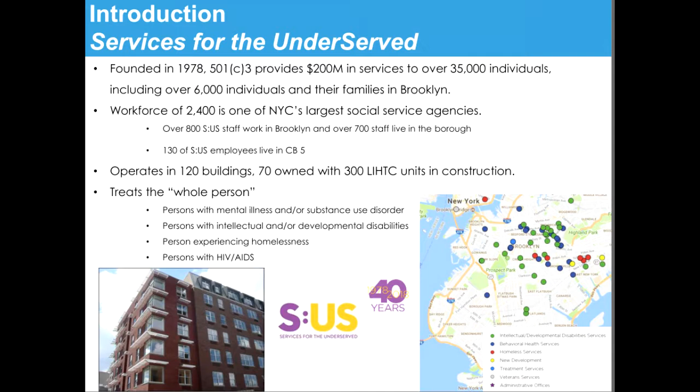disabilities. We were started to help people find community-based housing as a result of closing large state-run institutions for people with developmental disability and mental illness, such as Willowbrook, which some of you who are a little older may have remembered. And we now operate in over 120 sites throughout New York City, including over 50 in the borough of Brooklyn. We have a very large presence in Brooklyn.

Our first project, in fact, in 1981 was opened on Vernon Avenue. We have over 800 staff that work in our borough and over 700 that live in our borough of Brooklyn. We'll talk more about the service to be provided later.

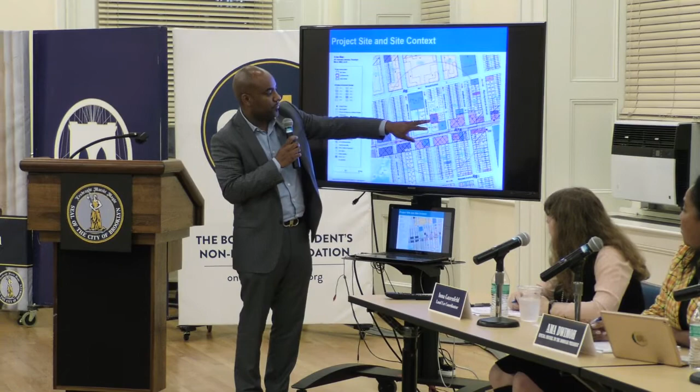So the project site and context, the site is illustrated here. That is the 461. You could take the mic out if it's helpful. Okay. It's 461, and as I was saying, CB Emmanuel owns and manages all of these sites here currently. This is Success Gardens, but this was the site. For the last 20 years, we've been here managing and operating this, and we've actually been maintaining this site as a green space during this time because it was just wild at the time.

It's between Livonia and Dumont. As you may or may not be aware, the Livonia corridor development has gone on, and there are 6, 7 and 8-story buildings along Livonia developed. These were the later ones. These were the earlier ones that were developed.

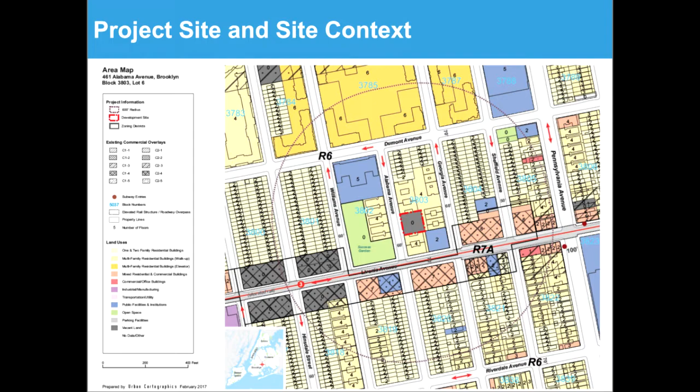This is more of the site. This is the actual street. This is Alabama. This is the site here. These are the buildings that I referred to that CB owns and manages. This is the actual site here on Alabama. It's near Success Garden, which is here on the corner. Lions Pride is a couple minutes away, and Martin Luther King Park.

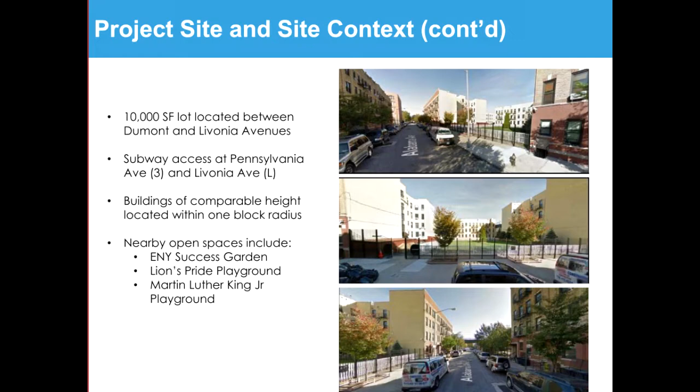The history of this project, well, first off, we applied for the minority RFP. We were awarded this site, and we had our kickoff meeting with HPD in January of 2017. After a few meetings with the council member on the dates illustrated here, March, July, and December, we've gotten input from her and from land use, and we implemented those suggestions into our plan.

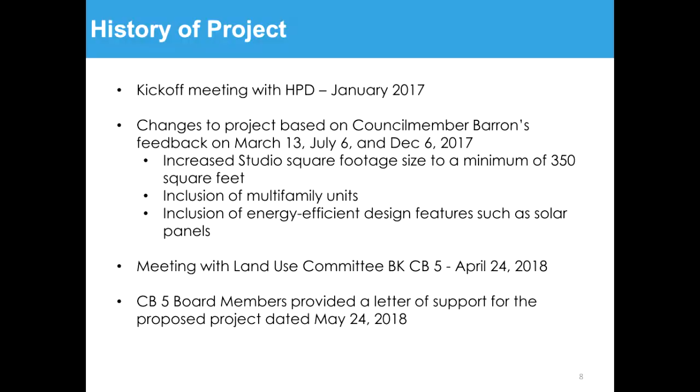We met with the land use committee in April, but we also met with them again in September because the ULURP process hadn't officially started, so we had to go back to see them again. And we just met with the community board September, I want to say 24th, and got their full support.

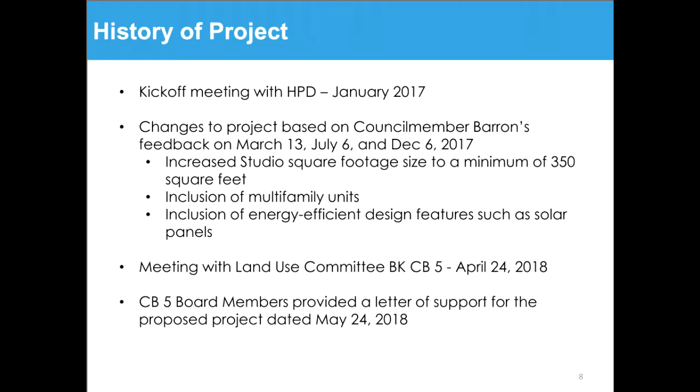The proposed program, we talked about the 70 units of housing, 1 super unit. There will be 43 supportive units that will service 40% AMI and down. The referral list is coming from DHS, and there will be 27 affordable units, of which 50% of these units will be marketed to Community Board 5, have a preference.

And just to point out the rents, it is a 100% affordable project. The estimated rents are $816 for a studio, going up to $1,224 for a 2-bedroom. And the estimated income is illustrated as well, $40,000 for 1 person, and up to 3 people, $51,000.

Thanks, Chris. So as Chris mentioned, 60% of the units are going to be reserved for people who are experiencing homelessness. They're coming from homeless shelters, and they have either a mental health challenge or a substance abuse challenge, or co-occurring, both. So for SUS, this is kind of our bread and butter.

This is exactly why we exist, to help people who are coming from shelters and in crisis, and to try and get their lives back together and on track. The service delivery begins at the time when we first meet the individuals.

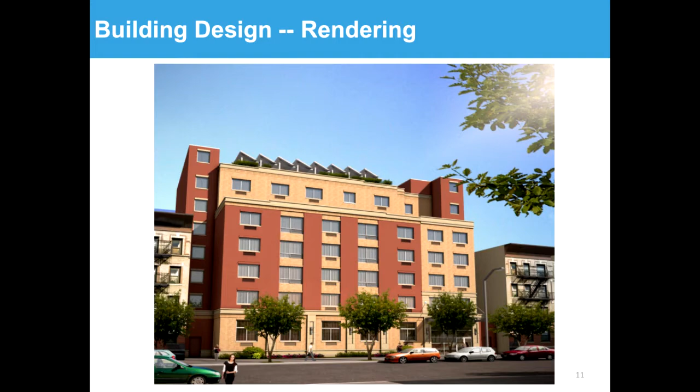In addition, we've added lights on those piers for security at night, so the street is lit as a pedestrian comes by. And we've incorporated, as you can see in the rendering, a small landscape bed there to soften that experience as well, so it's not just concrete sidewalk directly against a brick facade. To the right side of the rendering, it's somewhat hidden by one of the trees, but there's a glass entrance with a glass canopy, and that precast stone goes up for 2 stories to help announce that entrance.

It is a 7-story building, but you can see on the 6th and 7th floors, we have stepped the building back, again, to lower the visual impact for the neighborhood and for the pedestrians walking by. Additionally, the 2 stair towers, which are on the far sides of the building, are significantly stepped back, just to avoid creating a solid wall or solid mass from that streetscape. At the very top on the roof, those are solar panels, as well as a green roof will be incorporated into this project.

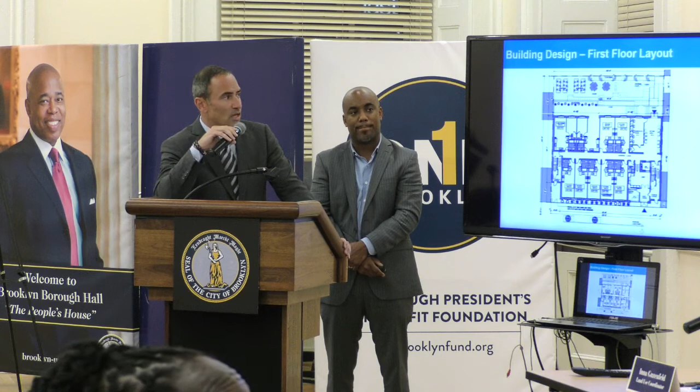So what we have here is a compilation of the first floor plan, as well as the rear yard on a site plan. What you can start to see here is we've incorporated Active New York design techniques. So when you first come into the building, in the vestibule, you do have the option of taking the stair tower up to the residential floors, as opposed to necessarily using the elevator, although the elevator is directly off that lobby.

As you saw on the rendering a moment ago, those stair towers do have windows on all floors, so it will be a very bright, vibrant area for the residents to walk up through if they so choose. Another nice feature on this first floor is this common area directly off the elevator. It allows the residents to congregate, to sit, interact with each other, and it's directly next to one of the community spaces, the computer room, which will have glass walls around it, so it can be integrated for both the people using that and the people sitting there.

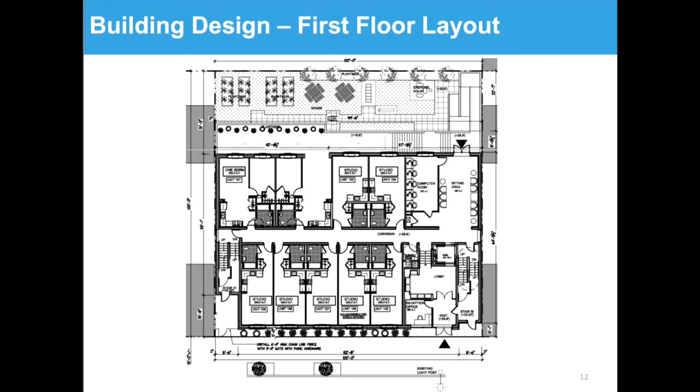We've incorporated a set of double doors here, glass doors, which lead out to the rear yard. That rear yard has an exercise path that, again, is part of the active New York design. But not only do we have an exercise path, we've incorporated gardens or planting areas for the residents to grow their own vegetation with, obviously, the help and guidance of SUS.

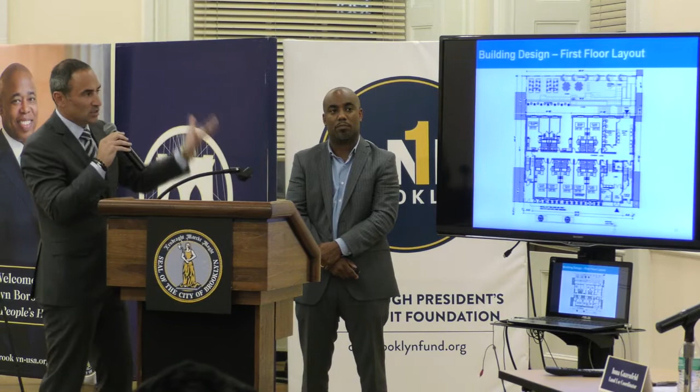What you start to see here as well, we have a larger staircase, approximately 8 feet in width, that comes down to this lower level, which has a tiered landscaped wall. That turns into an area which is allowing light and air down onto those community spaces that we were talking about. So SUS's offices are down there, as well as some of those community rooms, but they open up into this area and then can connect back to the rear yard as well.

So here's a typical floor plan, just to give you an idea of what I was referring to before about the stair towers being stepped back significantly, approximately 15, 20 feet. This is the typical floor in here. You see the studios, a double loaded corridor, studios, and then the 1-bedroom lines over here.

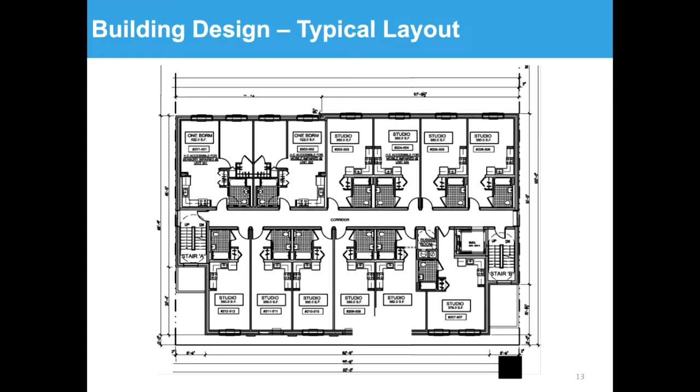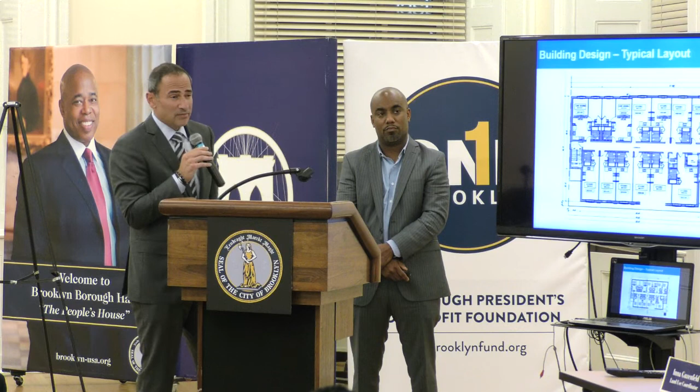Some of the additional green criteria that we're incorporating into the building would, as I had mentioned before, we had talked about photovoltaics or solar panels. In addition, the roof is occupiable, so we'll have a green roof that the residents can sit up there, experience the green roof, as well as sit and enjoy that area. We'll be using LED light fixtures, low flow plumbing fixtures, low or no VOC adhesives and paints, high recycled content in the finishes.

And as far as Passive House, we've looked into that, and while we cannot financially achieve Passive House certification, we've certainly learned a lot while going through the research, and we'll be incorporating certain techniques such as increased insulation, sealants, additional flashing, and especially HVAC design.

We do not anticipate puncturing holes in the exterior walls, similar to like a traditional PTAC unit or even a through-wall AC unit. We're not going to be doing that. We have not nailed down the final HVAC design yet, but there are several options, such as split systems or water source heat pumps that will allow us to keep the building tight and extremely energy efficient.

And lastly, our project timeline. As we stated earlier, the ULURP application was certified on August 20th, 2018. The community board reviewed 60 days. We met with the community land use first on the 25th and was approved. And we met with the General Community Board on the 26th and was approved as well. And today we're here to see the Borough President's review. And we're anticipating closing this project in December, if not sooner, of 2019. And that concludes. Questions?

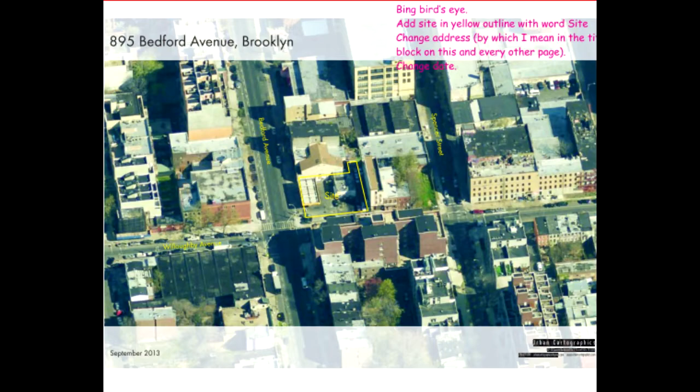Brian seems to be taking over Brooklyn by storm. He's a great architect, so you're lucky to have him designing some buildings in the borough.

We're proud to present this application for a rezoning, which you can see here is on the corner of Bedford and Willoughby. It's the site, of course, in the middle that's marked site. And it's a request to rezone that entire block front between Spencer and Bedford on the top side of the map there on Willoughby from its current manufacturing designation to an R7A zoning district with a C2-4 overlay.

I'm proud to say that we've been working for the better part of the last 2 years very closely with Community Board 3. We've been to 3 or 4, maybe even 5 meetings. I lost track, but we've been to a lot of meetings with Community Board 3 through the ULURP process. During almost that entire time, they were very welcoming to the project. They had a lot of suggestions, though, and a lot of their suggestions revolved around the design of the building. They're okay with the idea of the rezoning. They like the number of affordable units we're creating, and I'll go through that.

But I just want to cut to the chase: what they really wanted to see was the design. And I know it was a question that came up earlier, how we're going to memorialize that. So the brickwork on the building was something they wanted to see. We showed them samples, and we agreed on a brickwork. The black matte finishes on the building, they were very concerned because evidently some developers will put up an aluminum type of black matte, and I'll show you on the rendering in a second, and that gets dented. So they were very specific about the windows.

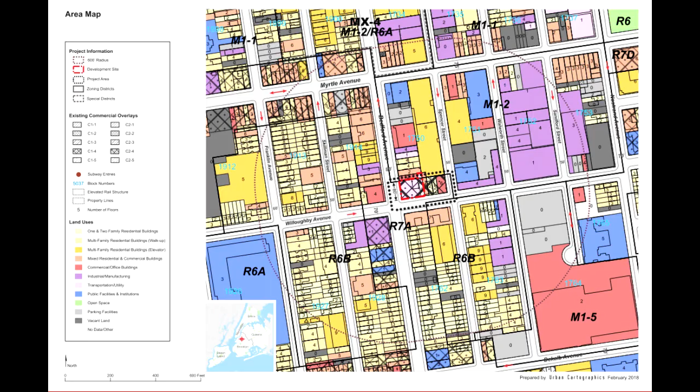These two we have been in touch with. There's residential also on the block on these two buildings that are between us and the corner. So by doing residential here, we feel we blend, as Marisa Tomei said in My Cousin Vinny, and we feel that we're well supported by not only Community Board 3, but as well as by our immediate neighbors

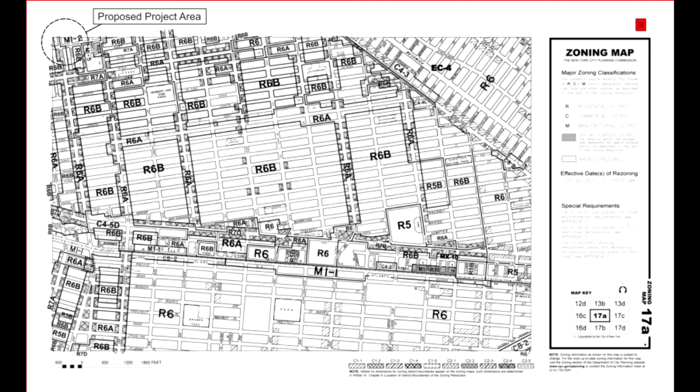who have supported it. Again, the tax map, the zoning map, this is stuff that you've all seen and you can't really read. But here's a very clear zoning map showing you, again, the zoning change. On this side, you have what we have right now. It shows you the M1-2 zoning designation encompassing the property. And this shows you the R7A I was speaking to, just being extended to cover our property, our block front.

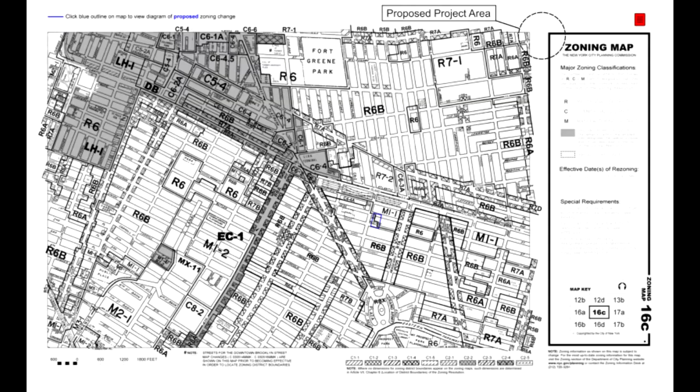This gives you an idea of the site itself. I didn't start off by telling you, I assumed you were familiar with it. It's an existing Shell gas station. Bill Wolf Petroleum is the owner. Again, I mentioned before, they are here. I know that we have a problem in Brooklyn with disappearing gas stations, and it is a concern. There's a reason why some of the gas stations are disappearing, and this is a good reason at this site.

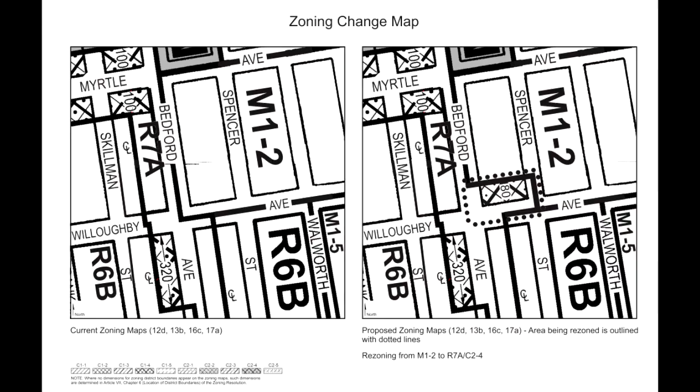It's an older site. It's got repair bays on it. Nobody really gets their cars repaired that much anymore. Some people do. I don't mean to imply that everybody is driving a car that was built within the last decade, but for the most part, the cars that were built within the last decade are no longer similar to the cars that were built in the 70s, and these cars don't need repairs as much.

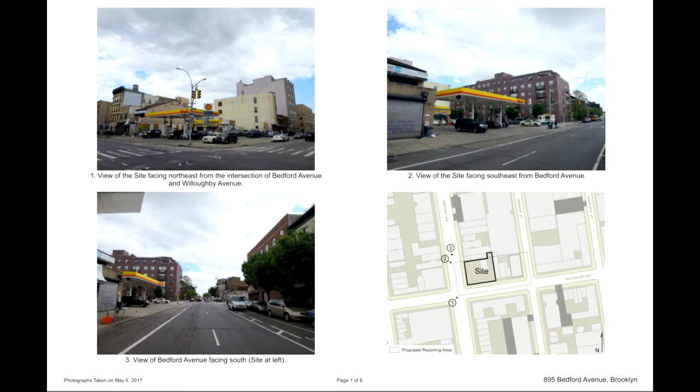So the repair business, and I'm sure you could appreciate that yourself, the millennials don't have cars, they have Uber, but the baby boomers that have the cars, those cars are all on leases. And the cars usually go back before they need extensive repairs. So the site is disadvantaged with the repairs. It's also disadvantaged because it's off the beaten path and it's not a big site. It can't do the volume that the gas station really needs to make the money.

Once you get rid of the repairs, the only way to make money in a gas station is by doing volume. That's why you see other stations, such as those on Atlantic and Bedford. Across from the Armory, there's a Mobil. I'm sure you're very familiar with it. It's big. It's got 10 pump islands out front. It's got a big convenience store. I'm sure you see it when you go on the Jersey Turnpike and all the highways. That's how the gas stations are, and that's how they make money.

So these old school gas stations, such as this, which is a relic that was opened back in the 40s, don't have the ability to make as much income, and that's why we're asking for the zoning change. It's barely functioning right now. Clicking through the photos, you could see what I was talking about before with the character of the residential buildings that are around us. So that was what I was trying to call out.

We're asking for, I think, a logical extension of the residential zoning district around us. Again, these photos all show you the residential around us and how we blend in. And just more pictures of the residential and taller buildings around us. I'll come back to the affordability, but I'll touch on it here for the purposes of our conversation, then I'll come back and dig in a little deeper on it.

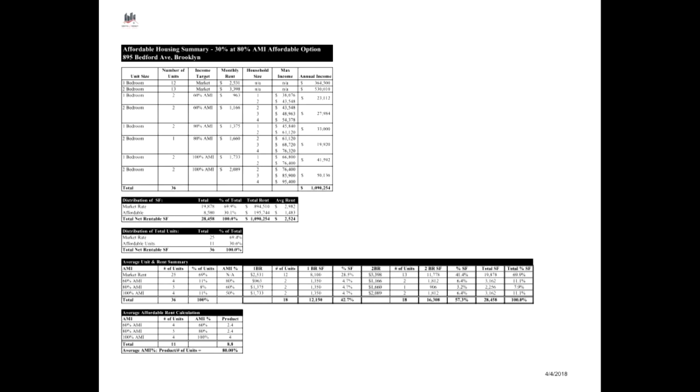We're asking for 80% affordability, 30% of the units at the 80% affordable level. There'll be a total of 36 apartments within the building. 11 of the 36 are proposed to be affordable. 6 of them will be 1 bedrooms, and 5 of them will be 2 bedrooms. And I'll come back in a second, and we'll talk about the matrix and all of that jazz, so we can go through the numbers a little bit more.

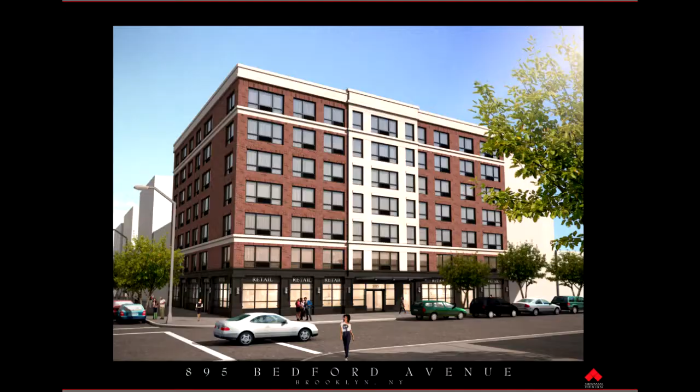They wanted the windows, they wanted to be sure that what Brian is representing here is actually what is built. And I know that and they know, they're very savvy obviously, they've been through this for years and years. They know once a rezoning comes through, a developer can build whatever they want. Here we're blessed with a great developer, they're local, they don't sell their properties, they own a lot of properties in New York City, they do not sell, they will be developing this, they're not flipping it. They have given their word that they will build to this specification.

I understand you would like something maybe a little more solidified. We're happy to give you a letter from them or an affidavit or some type of testimonial to their intent of the bricks that they intend to use and the facing materials and the windows. And Brian Newman, who you're beginning to see is quickly becoming a fixture, is the architect in Brooklyn. He's going to make the same representations I'm making.

There's not much more of a way that we could tie it into the development. We'd encourage you to put it into all of your paperwork so that it finds its way to the approval should the application be approved. And we'd be happy to use any other mechanism that you may see fit to tie it to the property.

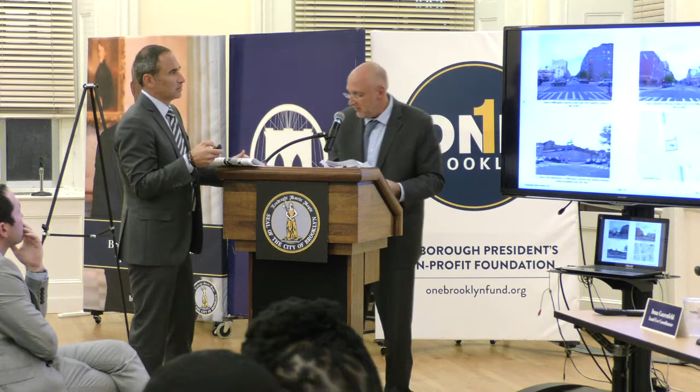Just going to go back to either the rendering or the plans. Probably be easier to visualize what I'm speaking about if we have that in front of us. Okay, here we go. So what we have here is obviously a rendering on the corner of the two front facades. Again, we like to break up the massing by using two different colors of masonry, of brick on the facade. The horizontal bands or cornice lines would be the precast stone on this project as well.

The lower level, or the ground floor retail component, that would be an aluminum panel cladding down there to give that sort of industrial modern loft style look. At that ground floor, you have the residential entrance, the glass canopy, which is cantilevered right in the center, just below the white section of this particular rendering.

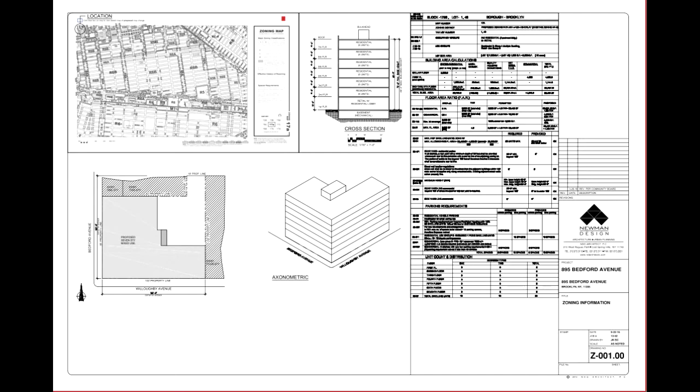This particular project would have a high SRI roof. We don't have a green roof on this particular project, but we'll go high SRI roof as another one of the green components. I'd like this to jump to the first floor and then actually to the cellar, because that was one item that the community board was very concerned about.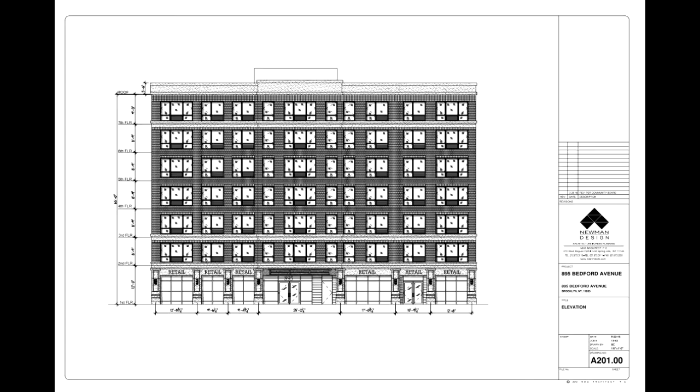A large area of the cellar is obviously going to be mechanicals, but we've also included the bicycle storage, laundry room directly across from the elevators, and we've also incorporated another amenity room for the tenants as well, directly off the corridor right by the elevators. So those were some of the concerns that the community board had as far as the floor plan, specifically on that ground floor with the retail and the amenity spaces for the residents as it's specific to that cellar area.

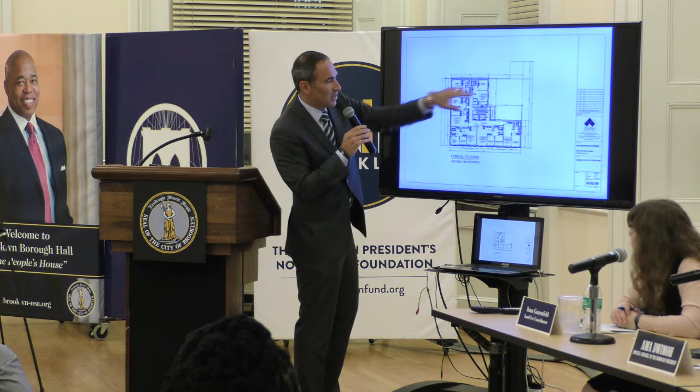The typical floor, 2nd through 7th, center core, elevators, stairs, double loaded corridor as it works its way around. The mix of the bedrooms just sort of working its way around. And then we have the windows out onto the courtyard, so you get light and air into those apartments as well. And that's what we saw in that rear picture of that rendering. We were sort of looking in that direction. And I'll leave you with this image if there's any other questions.

Okay, so although you mentioned about 80% AMI and you gave rents based on 80% AMI, just want to verify, will there be multiple tiers, or are you looking at all of the affordable? No, there'll be multiple tiers. And of course I put down my matrix. So, no, I'm good, I found it. Thank you for offering that back, thank you.

It ranges anywhere from 60, there'll be 2 one-bedroom units at 60%. I gave you the averages before. And I could pass up this matrix that I'm reading from, so you don't have to take all these notes. But there also may be people who will watch us on... I'll read it, so that way... And they'll know that rent or their income ranges for them, and they will be encouraged. I'll go through it for you verbally, so you could hear it, and I'll pass it up to you.

So for the listening audience, there'll be 2 one-bedrooms at 60% AMI, and those will rent at $963 a month. There'll be 2 two-bedrooms at 60% AMI. Those will rent for $1,166 a month. There'll be 2 one-bedrooms at 80% AMI that will rent for $1,375 a month. There'll be 1 two-bedroom at 80% AMI that'll rent for $1,660 a month. There'll be 2 one-bedrooms at 100% AMI that are at $1,733 a month, and there's 2 two-bedrooms at 100% AMI as well that'll rent at $2,089 a month.

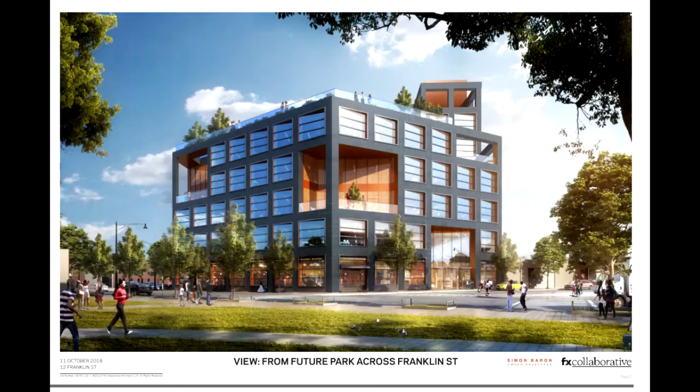Good evening. Hi. Thank you very much. We're looking forward to working with the Brooklyn Borough President and everybody who's involved with him. We're very excited about this project. It is a Class A office building, which we think the neighborhood needs to support all the entrepreneurs and small businesses in the neighborhood. What else can I tell you? Also, we're excited about the industrial and manufacturing space.

I'm Jonathan Simon, CEO of Simon Baron. We've been in business for 25 years. We did one other project in Brooklyn on Atlantic Avenue, which was 5 dilapidated walk-up buildings, boarded up for 17 years, that we turned around. And we won an award for that from the Cobble Hill Association. We love the project. We're very excited about it.

So I want to talk a little bit about the area and the background, what the approvals are, and Dan Kaplan from FX Collaborative will talk about the building itself. So just from a location standpoint, we're in the southern part of Greenpoint, near the Bushwick Inlet Park. The site is in the middle in red, and you can see it's part of a kind of triangular, somewhat oddly shaped block, but it's right in the middle of the Greenpoint-Williamsburg Industrial Business Zone.

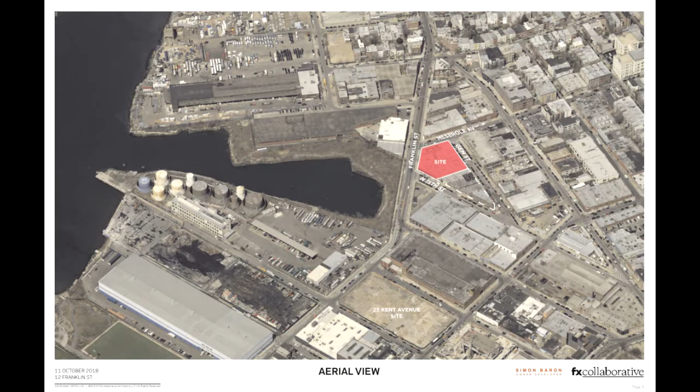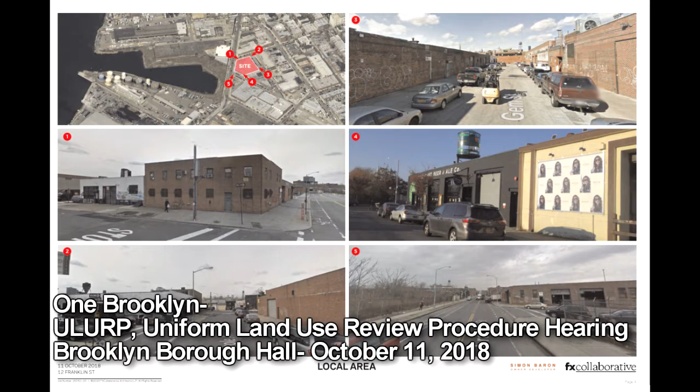From an existing conditions standpoint, what you really have is a site that is a compilation of some smaller buildings that have been used for warehouse purposes. There's a couple of bars in the site. It's an area that I think has a lot of potential, but at the moment it is really sort of in a low density and used more from a warehouse and a sort of entertainment standpoint than one that really generates a fair number or a lot of jobs.

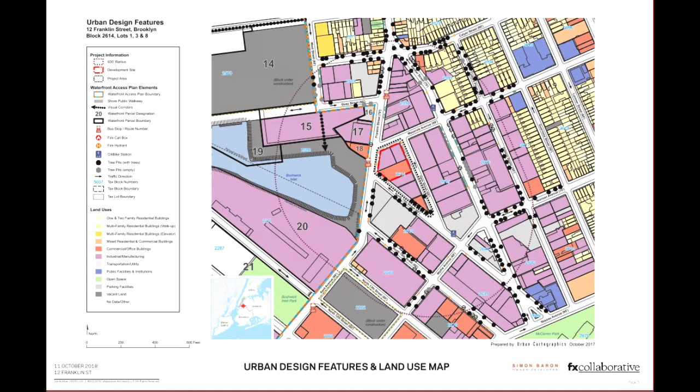It is nearby both the G train and the L train. There are 3 bus lines which serve the site. There are 2 ferries that are within a half mile of the site. There are a number of Citi Bike stations near the site, and there is a bike lane that runs up Franklin, which is immediately adjacent to the site.

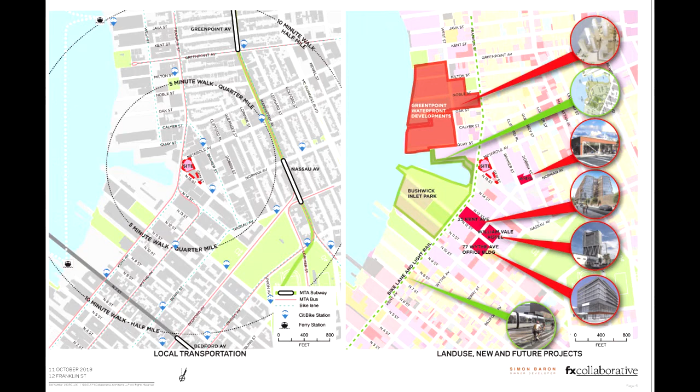It is also, while it's low density, in an area that is starting to see a fair amount of development of different sorts, including some office space, but more from a hotel standpoint, and then along the waterfront for residential. From a zoning map standpoint, it's in an M1-2 zone, which is the zone which allows for the applications that we are looking at today. So these are the proposal.

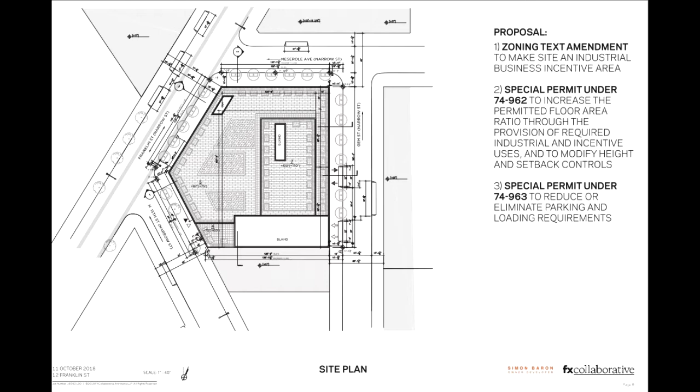There are 3 actions. The first is a zoning text amendment that would allow for this site to be identified as an industrial business incentive area, which allows for an applicant to seek special permits pursuant to 74-962. The special permits that we are requesting are 2. One is for a building which would be allowed to be built to an FAR of 4.8 on the condition that at least 0.8 of that floor area is used for a certain amount of required industrial uses, and that the additional area is used for a combination of what's called incentive uses and permitted uses.

The final special permit we're asking for is for a reduction in the parking requirement from what is, for the size of this building, a somewhat extraordinary number of almost 400 cars to 36 spaces, which we think is the right number for this particular project.

Just looking at the zoning map amendment, what we'll be doing is a very simple, straightforward text amendment, which will add the triangular block on which the project is located onto a map and identify it as an industrial business incentive zone, and then seek the special permit, which again would be conditioned on the inclusion of 22,300 square feet of light industrial space as part of the project.

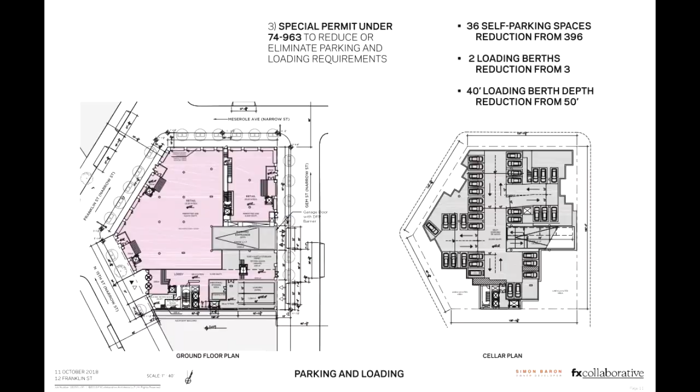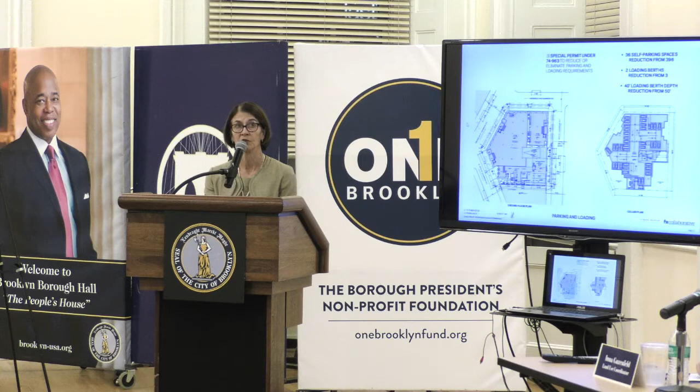And the third special permit would really allow for two things. It would reduce the parking requirement as indicated to 36 spaces in the basement of the site, really the cellar. It would also change the loading requirement to limit it to 2 loading berths and allow for those berths to be 40 feet instead of the 50 feet, which is typically required in manufacturing districts, assuming that there would be much larger trucks than would be coming to this site.

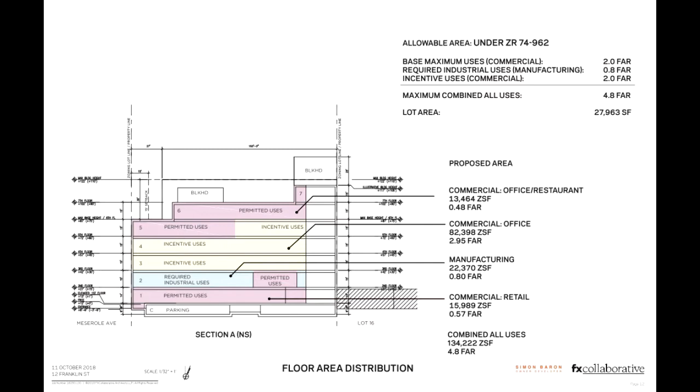From a stacking standpoint, the required industrial use space would be located on the second floor. As of right, permitted uses would be located on the ground floor. They would likely be retail, and on the upper floors there could be sort of a rooftop bar or they could be office space, and the rest of the project would be office space. So that's sort of the overview from a zoning standpoint, and I'll turn it over to Dan to talk about the project and the design of the project.

Thank you, Melanie. Dan Kaplan, FX Collaborative Architects. I'm just going to walk you through the project quickly. This is the site plan. The site and the building is in the center of the plan, surrounded by streets on 4 sides. It's a 5-sided building. Very, very interesting shape. A little bit closer.

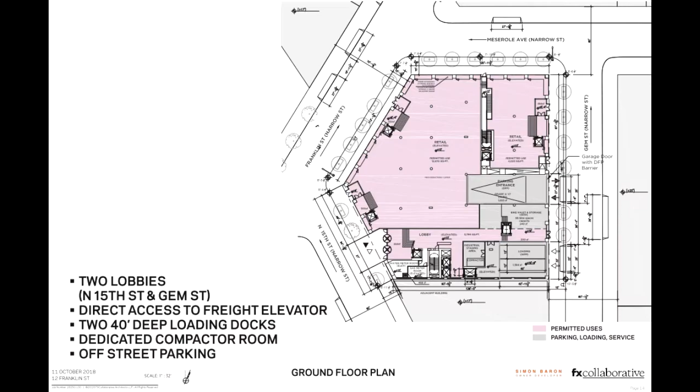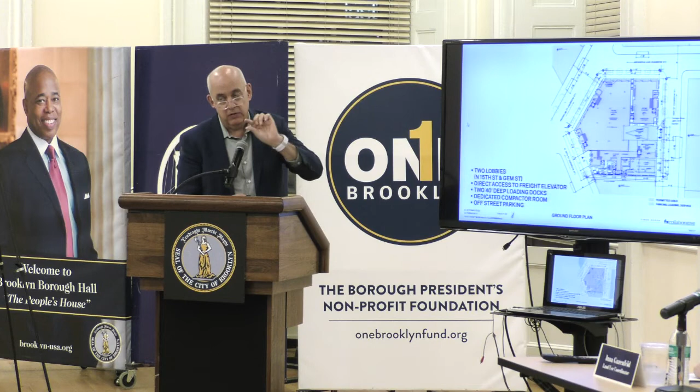This is the ground floor plan. I'm just going to go clockwise from the bottom left. There's a through lobby. Then there's retail on 15th, Franklin, Meserole, and wrapping around basically half of the frontage of Gem Street. Then there's a ramp that takes you to below grade parking. Then further down the page, the bike storage, which is bike parking directly accessed off of the sidewalk, and then the 2 loading berths.

I just want to point out for the industrial use with the loading berths, they're 40 feet deep. That's larger than the typical New York standard of about 34. So they're 40 feet. There's a compactor that's also included, and direct access to the large service elevator. So it's set up for industrial use.

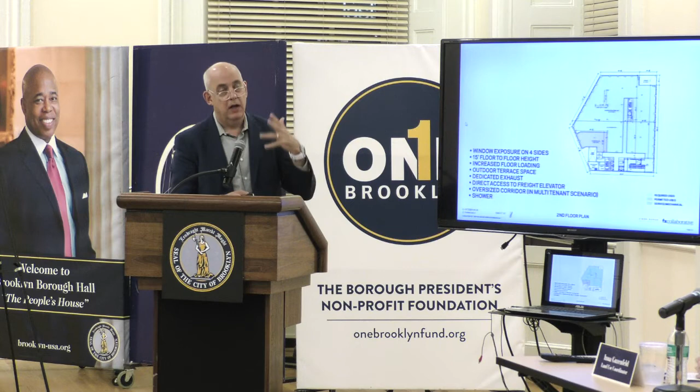Second floor would be, as Melanie said, the industrial use, the light manufacturing use. Again, set up for this use, 15-foot floor to floor, a wide corridor, heavy floor loading, access to the freight elevator, showers, independent exhaust systems. So it's really a light manufacturing setup that can accommodate smaller tenants.

The other plans, as Melanie has said, are essentially commercial use from 3 up to 6. 3, 4, and 5 are really set up as office space. 6, which has a large roof terrace, could be office or food and beverage. 7th floor has a very small footprint and is really the access to a second roof. Some aerial views of the building.

Architecturally, what our concept was here was not to make an all-glass building, a sort of Hudson Yards building, if you will, but to make something that was more rooted in the industrial heritage of the area. So it's large, overscaled windows in a grid-like pattern, then merged with a more contemporary approach of 2-story high cutouts with access to greenery from each floor.

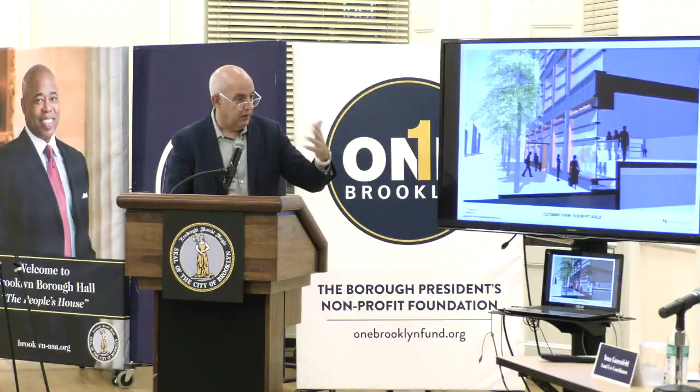But in order to make a sidewalk experience that isn't sort of cut off, which is really pedestrian oriented and pedestrian friendly, we have lowered the show window so that it is really within the flood zone. We have worked this through with City Planning and with the Department of Buildings so that the show windows themselves and the entrances, of course, are wet flood proofed, and that the retail space above that is basically above the floodplain.

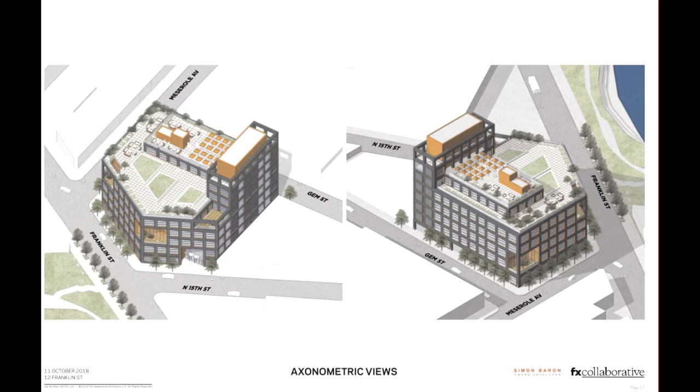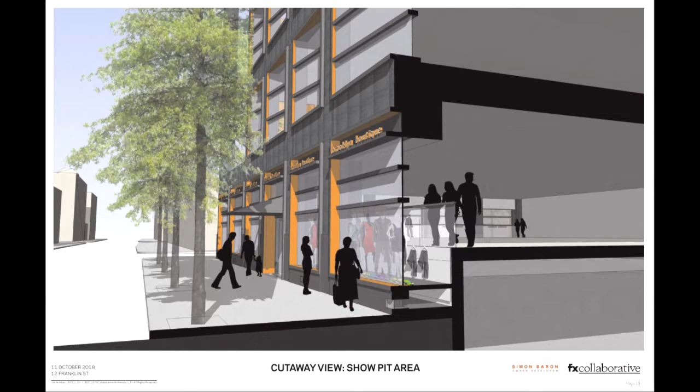And then this is, again, the overall view. This building will front onto the park that will be coming one day soon across Franklin Street, and we think it's a good complement to the park, including these large cutouts and the green roofs.

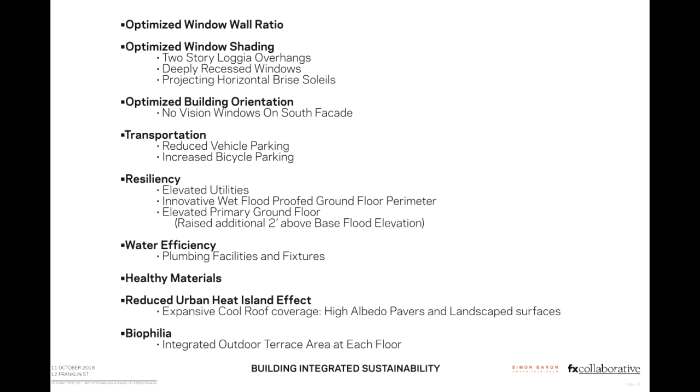2 things in closing, just summarizing the advantages, benefits, the attributes of the project. One, it preserves and enhances the local manufacturing job base. It reinforces the industrial architectural character of the neighborhood. It establishes needed Class A office space in Greenpoint. Again, the floors are set up for smaller tenants, larger tenants. It's really crafted for those that need.

It creates an active pedestrian retail environment near Bushwick Inlet Park and really on those surrounding streets, and provides environmentally responsible and resilient space.

And just in terms of the sustainable and resilient characteristics of the building, as I said before, we are not doing an all-glass, typical office typology type building that you would see in Hudson Yards or, let's say, Lower Manhattan. Those buildings are approximately 2/3 glass. I know some of them look like they're all glass, but 2/3 of them are vision glass, and the other is a spandrel or opaque glass. So our window-to-wall ratio is half of that. It's approximately 35%, 34%. So that is the largest driver of energy efficiency, having more opaque surfaces.

It also works with tightness of the wall and increased insulation and reduction of heat that's needed for air conditioning in the warmer months. So we have that. The windows that are there are shaded. They have integrated solar shades. They're 2-story high overhangs on those cutouts and those loggias.

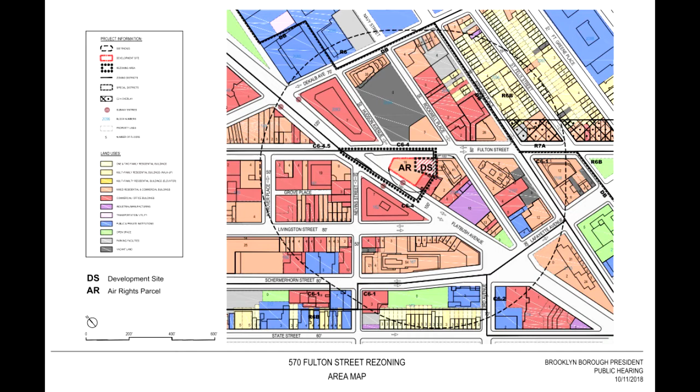Before we move forward, I'd like the record to reflect that Crystal Hudson, representing Councilmember Campbell, is present. Thank you. I am Jay Segal, and I am going to ask my colleague, Ali Carreri, to do the presentation.

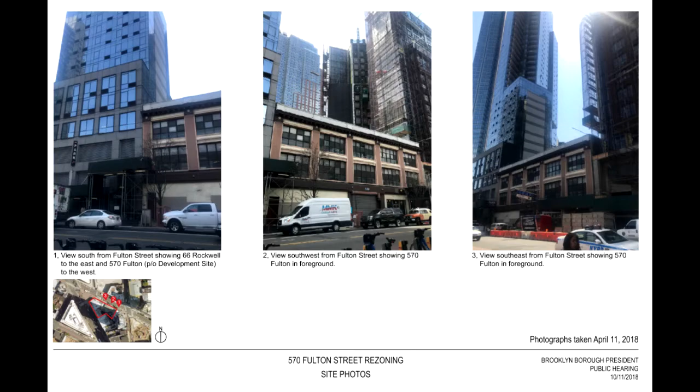The rezoning and related actions, which I will describe shortly, are intended to facilitate the development of a 202,000 square foot, 40-story building consisting of 2 stories of retail, 15 stories of office use with approximately 87,000 square feet of offices, and 23 stories of residential use above.

And the main reason for the application that we're describing is to add that 87,000 square feet of office space, which will have relatively small floor plates of 5,700 to 7,500 square feet, which we think will be consistent with the Borough President's 2004 report.

So the 570 site, which you can see in the middle drawing there most clearly, is developed with a 3-story building. It's been completely vacant for about 2 years. It's adjacent to 1 Flatbush, which you can see, and that's being developed by the applicant Slate as well, and we'll discuss that in a little more detail later. It's also adjacent to 66 Rockwell building, which was constructed in 2013.

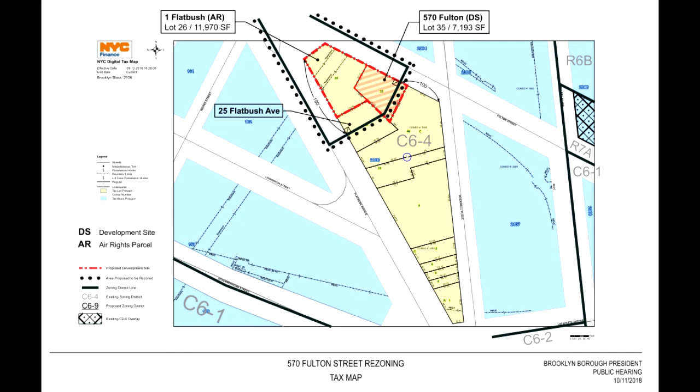So here's a closer up of the area to be rezoned. Thank you. Closer up image of the development site, which is highlighted in the striped area. The red outlined area is the zoning lot, which consists of the 7,200 square feet development site at 570 Fulton, as well as a slightly less than 12,000 square foot parcel that is being developed with the One Flatbush building.

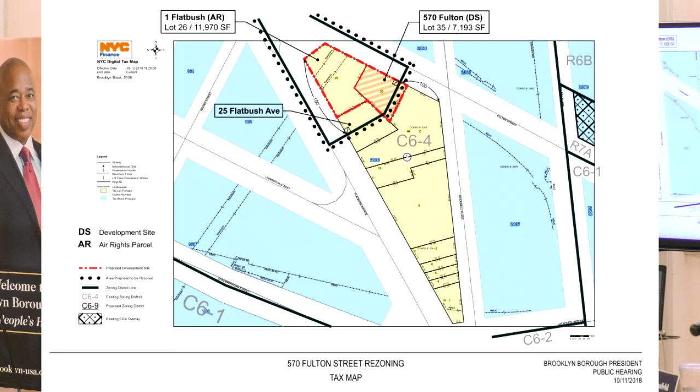That's a new 19-story, 12 FAR mixed-use quality housing building that received its first partial TCO about a week ago and is expecting to get its full TCO by the end of the year. That building has inclusionary housing units and affordable housing under the old 421A program.

So the zoning lot as a whole is about 19,000 square feet. It would consist of 570 Fulton and One Flatbush. And the proposed 570 building would use air rights from One Flatbush that are generated by the rezoning that's proposed.

There's a portion of 25 Flatbush Avenue that's also in the rezoning area. That's not part of the zoning lot. That site has already transferred its excess floor area to 66 Rockwell, adjacent to the south, and less than half of it is included in the rezoning area.

So these are the actions that have been certified into ULURP by City Planning. A rezoning of the rezoning area from an existing C6-4 district to C6-9, which would increase the maximum FAR for commercial and community facility use from 10 to 18, while no change would be made to the maximum residential FAR, which is 10, bonusable to 12 with inclusionary housing.

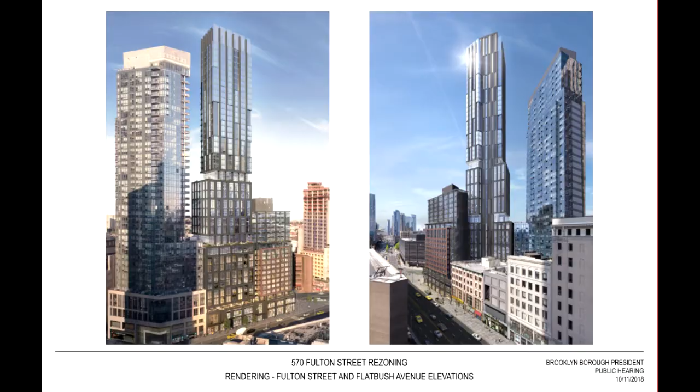As I noted, the residential FAR wouldn't be increased under this action, and City Planning has determined that because of that, mandatory inclusionary housing doesn't apply to this action, but the developers will be seeking Affordable New York real estate tax benefits by providing affordable housing, a portion of which would be under the inclusionary housing program in order to increase the residential FAR to the 12 that's permitted currently.

And as I said, the relatively small office floor plates we think are the right size to attract small-scale local companies, incubator-type office space for growing companies.

This is just an image to show you the kind of ground floor retail scape. This is an image to show that the proposed building would be in keeping with the heights of tower buildings within the area, including the existing building right on the same block, 66 Rockwell that I mentioned before, and buildings on the immediately surrounding blocks, including the Ashland at 250 Ashland Place and 333 Schermerhorn.

We didn't put the super tower at 9 DeKalb that's going up on here because we didn't want to look like we were cheating, but that would also be, I think, just south of 1 DeKalb up there, so a little bit closer to the development site, and that's going to be 1,000 feet.

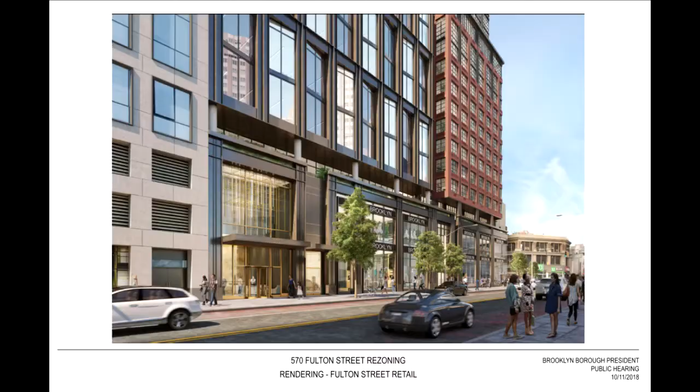We, as I mentioned, are applying for certain waivers, bulk waivers under the special permit that we're creating. And these are all intended to reduce the overall height of the building and get better floor plates. And I'm available to answer any more specific questions you have about those. And we have David Schwartz from Slate available and David West from Hill West available to answer any questions about the building.

Is that the conclusion of your testimony? Okay, thank you. Regarding the intended affordable housing units, what is the qualifying income range for prospective households based on household size? And what are the anticipated rents based on the number of bedrooms? And what is the distribution of units by bedroom size?

Hi, everybody. I'm David Schwartz, if we haven't met. So we're going to be applying to one of the Affordable New York programs. We want to have further discussions with both the Borough President's office as well as the councilwoman to make sure that we have the appropriate ranges. They will be in proportion with the unit mix of the rest of the building as well as dispersed throughout. And obviously, everybody will have the same entrance and use of all the same amenities throughout the building.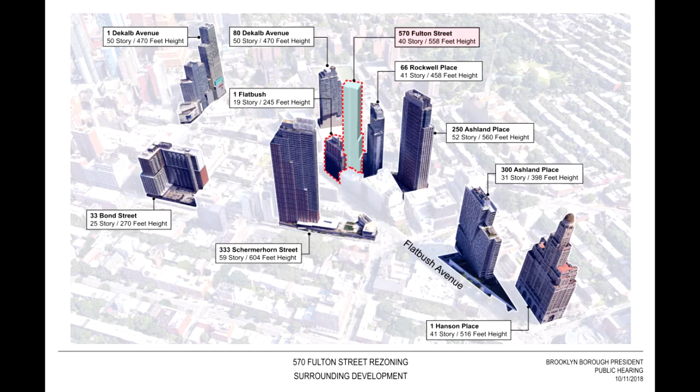It's something that we would be very interested in discussing further. We're big supporters of community groups in general, big supporters of the arts. We've been involved. We actually had a nonprofit that supports local artists called Space that we've done. We love that. It's one of the reasons that we love this neighborhood, so we would love to continue discussions with the Borough President's office, with the Councilwoman's office, and anyone else from within the community or frankly within Brooklyn on some good ideas for that.

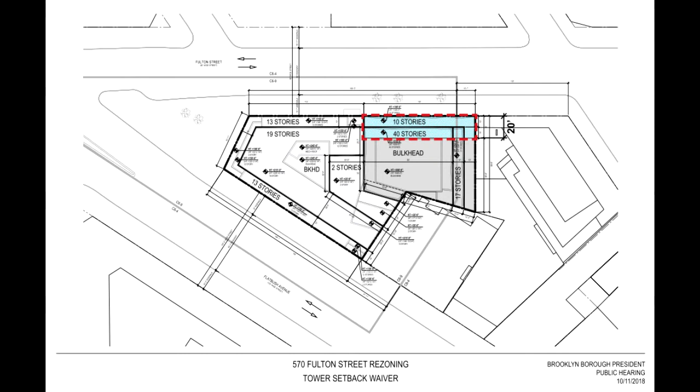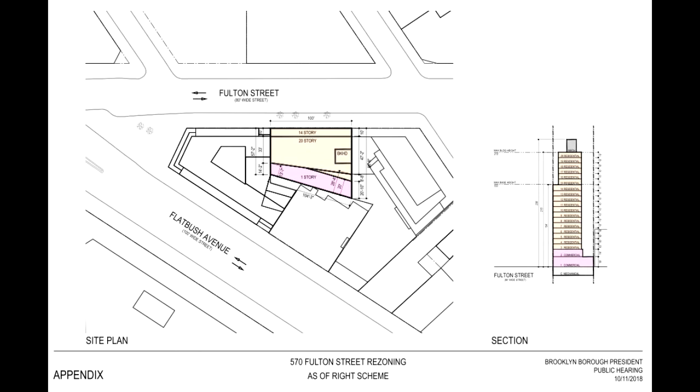And the Borough President's policy has been talking all night about sustainable and renewable energy resources to advance a sustainable future in Brooklyn, and also policies in terms of practices to retain stormwater runoff. So if you could talk about considerations being given, whether it's cooperation of DEP with their rain gardens or Mayor's Office of Sustainability, NYSERDA, NYPA, towards incorporating passive house design, solar panels because of your height, wind turbine, blue, green, or white roof coverings, and the rain gardens.

So environmental sustainability is very important to us. We will submit a comprehensive letter to you that outlines exactly what we plan to do within this building, but it is something that we understand the importance of and that the Borough President has placed on it, and it's something that's important to the development team as well. So we'll send you a detailed letter on that. Thank you.

It is Borough President Adams' policy to maximize good quality jobs for Brooklynites. Please outline what steps will be taken to ensure the inclusion and participation of minority and women-owned business enterprises and local business enterprises in the process of construction on this site.

So that's a great question. It's something that we do on all of our projects. We agree with the Borough President wholeheartedly. We will be working with By the Numbers Consulting and Team Brown Consulting on this project to ensure that we exceed the number of MWBE hires as well as local hiring. We've done that successfully on many projects, both projects that are requiring discretionary action and the regular projects that are just as-of-right jobs.

We do it on all of our jobs. It's something that we're really proud of as an organization, something that we want to continue to do, and it's something that we will do here. And actually our groups are here, Manny from BTN as well as Ed Brown from Team Brown Consulting, who will be continuing to work with us on this project. Thank you. Thank you.